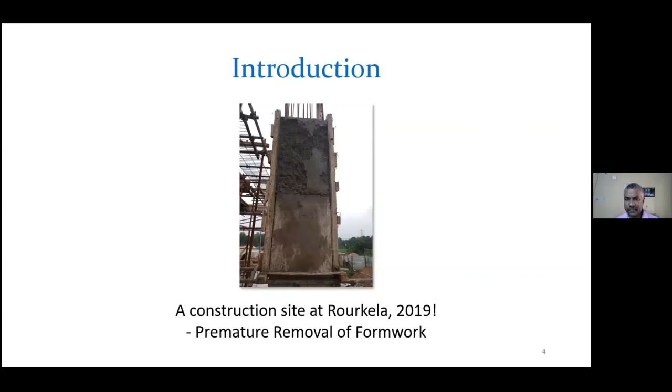Now, the problem is paucity of available instruments for civil engineering structures, and lack of technologies available for the automation of civil engineering construction. So we don't have instruments to place and get information from civil engineering structures, and there are no technologies for automating this to avoid this type of problems.

But you can be sure that automation in the construction industry is indispensable to significantly improve productivity, quality, economy, safety, flexibility, accuracy, and whatever you think. Automation is coming in every other domain of engineering, but it is not aggressively coming to civil engineering construction. So there is scope of work for all of us, all the civil engineers, in this particular area.

So this, as I said, is a big problem. A lot of things to be done. In our group, we have started a small first step forward in this direction, and for the last 2 years some students have been working on it. I want to share what we have done, and I feel it will motivate all of you to bring some of your interest into this particular area. The problem we have first started is monitoring of early age properties of concrete at real time.

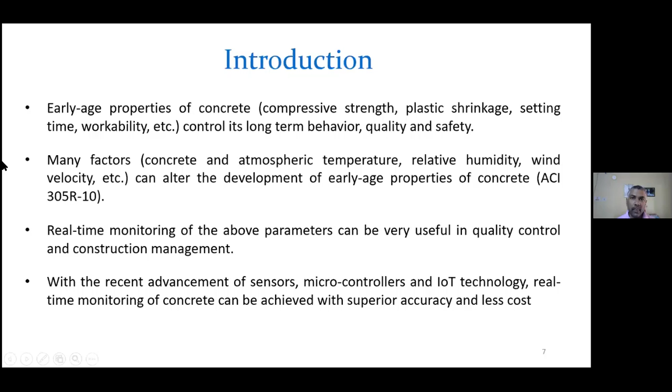Now let us concentrate on compressive strength of concrete. So how do you measure compressive strength when concrete construction is going on? We do check concrete compressive strength, and we check the quality of concrete through this parameter, the compressive strength of concrete.

What we do is take specimens, either cure them at the field itself or cure them at the laboratory, and then test them after a certain time, on the 7th day or 28 days or 14 days. Now, whatever curing condition you are doing for the specimen, you may not be doing the same curing condition for the structure. So there is a variation of curing condition, and your field-cured or lab-cured specimens do not represent the actual curing condition of the structure.

Definitely there are other conditions, like your local environment of the specimen and local environment of the actual structure may be different. So it does not represent the in situ concrete. The specimens really do not represent the in situ concrete. So whatever strength you get for the specimen, they are not representative, most often, to the actual structure.

There are other problems. Let us assume they are giving you actual info representing the structure, but you are getting a delayed result. You know the problem at the 28th day, or 7th day, or 14th day, when you are not in a position to make a change in your structure. So this is not useful in that sense. When you know the problem, by that time maybe the structure has progressed a certain amount, and you cannot dismantle that part and correct the problem. So you have to do something else.

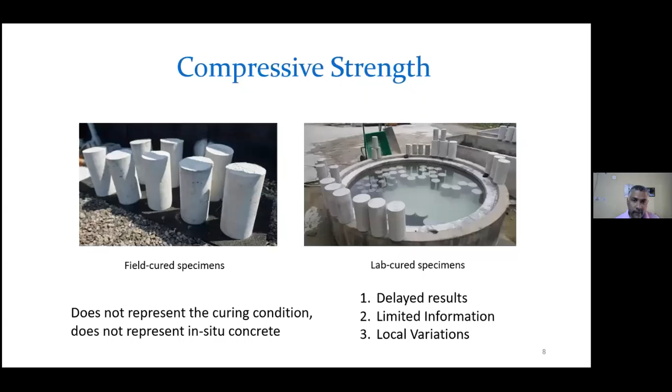So that is one more problem. To support this, there is an instrument called the concrete maturity meter. What is that concrete maturity meter?

Concrete maturity is a very old parameter. Maturity is a function, a temperature time factor, TTF. In different codes and standards, this temperature time function is directly correlated with the compressive strength at 1 day, 3 day, 7 day, and 14 day. From this function, we can find out the compressive strength at different times.

So maturity is a relationship - maturity is a temperature time function, and there is a relationship between this maturity and the concrete strength of a given mixture. This relationship is used by the concrete maturity meter, and it can tell you the progress of strength, or how the strength is evolving at early ages.

So what is this maturity method? Maturity method is a concept that has existed since 1950. It is a non-destructive method to estimate the strength development of in-place concrete, specifically at the early age. Early ages means less than 14 days age.

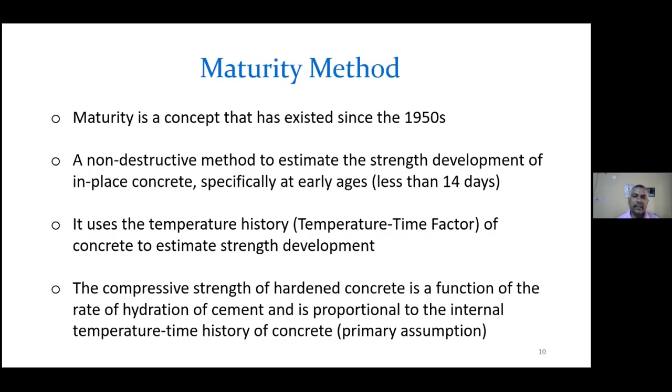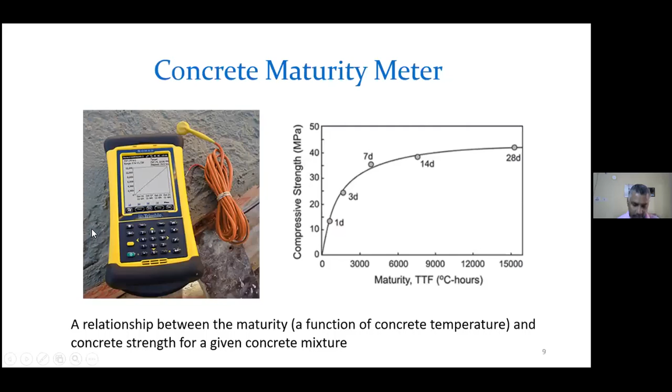Now let's see how to find out this datum temperature. This datum temperature comes only for the American standard, and the code gives a procedure to calculate it. Otherwise, you can conservatively take some values. The code gives some values, but it is not very difficult to develop this value of datum temperature.

As per this code, for a given mix of concrete, we develop a strength-age relation using a mortar specimen. For this mortar specimen, whatever the cement-to-aggregate ratio, similar cement-to-sand ratio, we prepare the mortar. For the given mix, represented by cement to aggregate and water to cement ratio, keeping everything intact, we develop the mortar specimen of a particular mix.

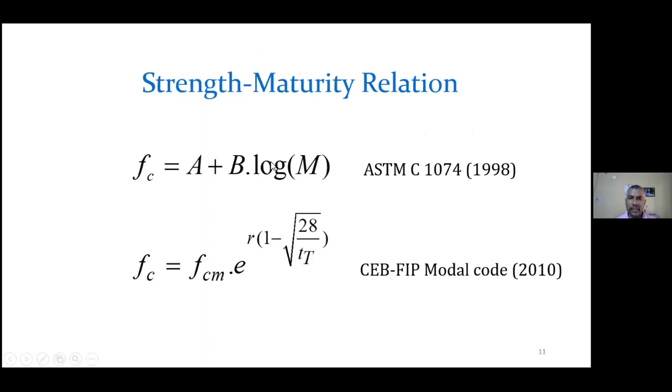If we know the datum temperature, I will record the temperature with time - temperature time history - and deduct the datum temperature. At that age I take this area, I get the maturity, and from this maturity I use this formula to get the FC. That is what our maturity meter is doing. Therefore I can find out the strength.

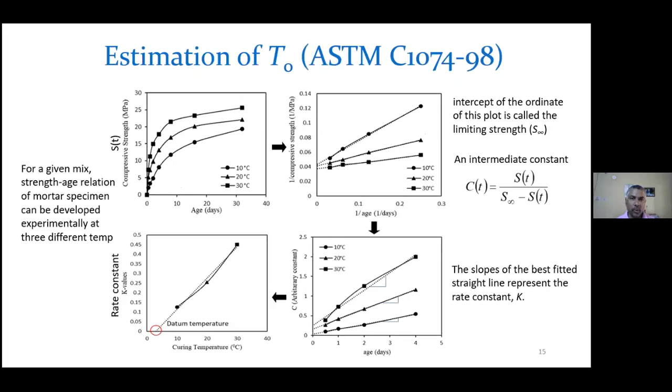But what is the problem with this maturity meter? There are certain drawbacks - I will not say drawbacks, certain problems with this maturity meter.

The manual recording of compressive strength - what they do is put a sensor inside the concrete while casting, with some Bluetooth mechanism. They send temperature data to an instrument with an SD card, and you have to go with this instrument to the site, take the temperature data at a particular time, come back to your computer, process this data using equations stored in your computer. So you need software to process this data, which tells you what the strength is.

So it is not a continuous process. You will get intermittently the compressive strength data. There will also be a lag of time. When you go and collect the temperature data and process it, you get data that is not exactly real time - there is somewhat a mismatch of time.

Manual recording of compressive strength of concrete at the site by measuring the internal temperature - as this instrument is operated manually, frequent recording of internal temperature is cumbersome for real-time prediction of compressive strength. A software program is generally required by the conventional maturity meter to extract and analyze the data in a computer. That means again you have to trust another person.

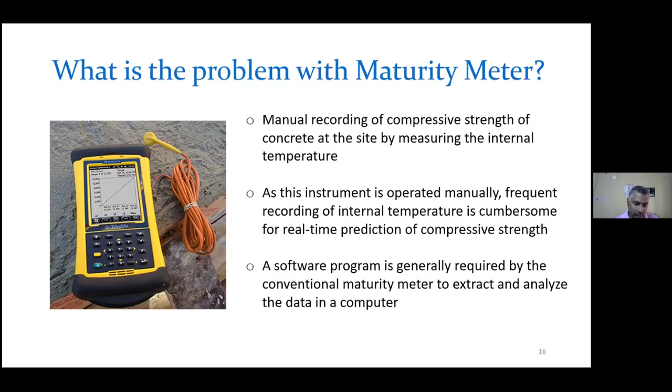The construction manager will send someone to get the data, and he has to depend on his performance. By the time he processes the data and gets the values, it is not real time data. So our objective of today's presentation is to show you how we have automated this procedure.

How to overcome this shortcoming? To automate this procedure, an IoT enabled setup is proposed for real-time monitoring of early age compressive strength of concrete using the principle of maturity method. We are not proposing a different method, the same method, but I want to show you a procedure which will truly make this system automatic.

And these same two codes we are also following. And now I said IoT enabled setup - for us civil engineers, we don't know what IoT is. What is IoT? I also did not know 2 years back. Recently, I came to know about that.

IoT is Internet of Things, a network of interconnected devices that can communicate data gathered from a monitored field through a wireless link. This is the definition I got. There is no human interaction required - it is only machine to machine communication.

So you see there are some devices, sensors and actuators, whatever devices are there, they send the data to a gateway. From the gateway, the data goes to a cloud platform, and from the cloud platform you can get the data in any application that you want. So this network of interconnected devices communicates data gathered from a monitored field through a wireless link without requiring any human interaction - directly from device to application you get the data.

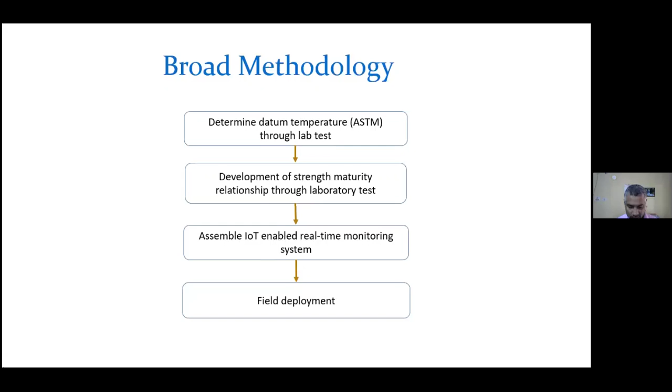Once we know the strength maturity relationship, we assemble this IoT enabled system and deploy it at the field. This IoT enabled system is a framework of interconnected devices where the strength versus maturity equation is already built in. Sensors in the field measure the concrete temperature, which helps calculate the corresponding maturity and therefore the corresponding strength, and this strength data becomes available on remote devices like a mobile phone.

In our problem we need only concrete temperature. So in a structure we put a sensor connected wirelessly through a Wi-Fi microcontroller, needed for sending data to the cloud platform. The data collected is temperature versus age, so as time progresses, how the concrete temperature varies is recorded as the temperature time history.

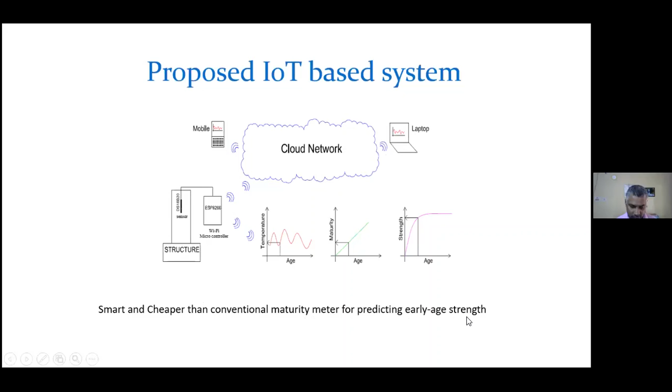Once we have the temperature time history, we can find the maturity, which keeps increasing as age progresses. From this maturity data we find the strength data, since we already have the maturity-strength relation. This strength versus age data goes to the cloud platform, and from there to mobile or laptop, accessible everywhere. It's a smart and cheaper system than a conventional maturity meter for predicting early age compressive strength. This is as simple as that.

Now I'll tell you a little detail about that. We have chosen a temperature sensor, and you can see its size is actually very small, with a wired connection to connect it to the microcontroller. This sensor is digital, waterproof, with a one wire interface, and it can resist the alkaline type environment of concrete.

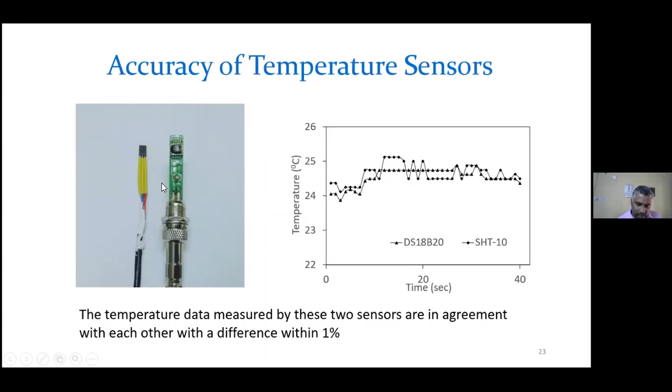Now we need a microcontroller. The sensor will record the temperature data and send it to the microcontroller, but the microcontroller will process the data. That means the microcontroller has all this program, and it will calculate the maturity and the strength. The program here will be calculated.

So it is small in size. You can see the size in comparison with a 10 rupee coin. It is low cost, and it is a 2.4 gigahertz Wi-Fi microcontroller that can make a simple TCP/IP connection supporting an 802.11 network.

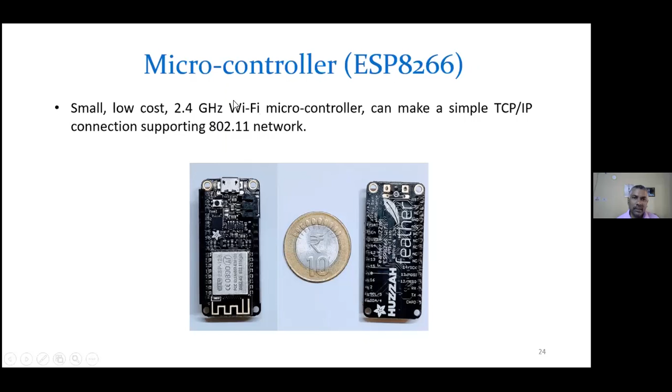So these are some electronics information. The total setup is like this: we have a board where this microcontroller is attached, and this sensor is also attached with the board. This sensor will actually be inserted in the concrete, and the concrete temperature will be measured and the data sent to the microcontroller.

DS18B20 sensor is connected to the ESP8266 Wi-Fi microcontroller, which will connect to the internet and post the data in the cloud. So you need to have a Wi-Fi router also. The availability of internet is required so that this microcontroller can send the data to the cloud.

We need a storage platform on the internet, and presently we are using thingspeak.com, a cloud platform, to receive the data from wireless sensor nodes through the internet and to supply the information whenever required for further processing and display. The red line shows a typical ThingSpeak plot where we can also get this temperature versus time data. You can see here on thingspeak.com we are getting the time history of the concrete temperature.

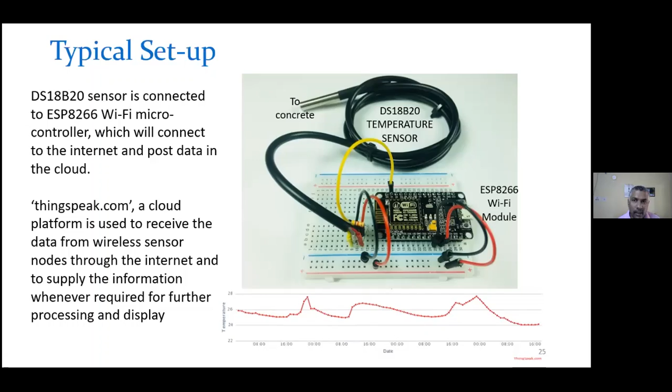Now I want to summarize the total procedure. The prediction of early age strength requires the strength-maturity relationship of the given concrete mix. This relationship must be calibrated with actual strength data for accuracy. The DS18B20 sensor records the internal temperature of the concrete in real time and sends the data to the ESP8266 Wi-Fi microcontroller. The microcontroller calculates the early age compressive strength based on the developed strength versus maturity relationship for the corresponding concrete mix. Is that clear to all of you?

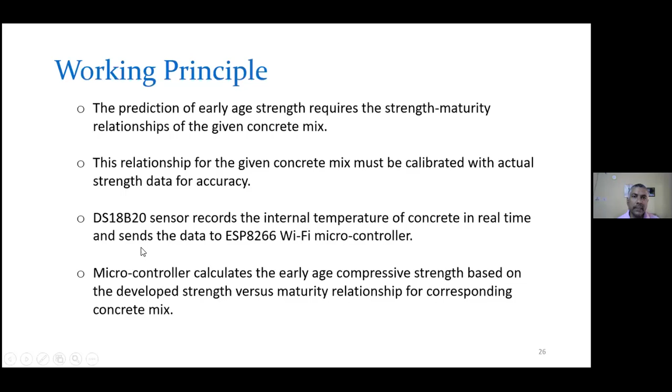Now, how does it calculate? It requires a program, right? So the Arduino integrated development environment is used to program this microcontroller using the C programming language. This is the program that calculates the strength or maturity from the temperature time history.

A new channel was created in thingspeak.com containing the following fields: the microcontroller sends data of temperature at real time, maturity index at real time, and corresponding early age compressive strength also at real time. The address of the ThingSpeak channel and the Wi-Fi login credentials should be provided in the C program, because the C program is going to send the data. So the address of the cloud platform channel and the Wi-Fi login credentials should be provided in the C program fed into this microcontroller.

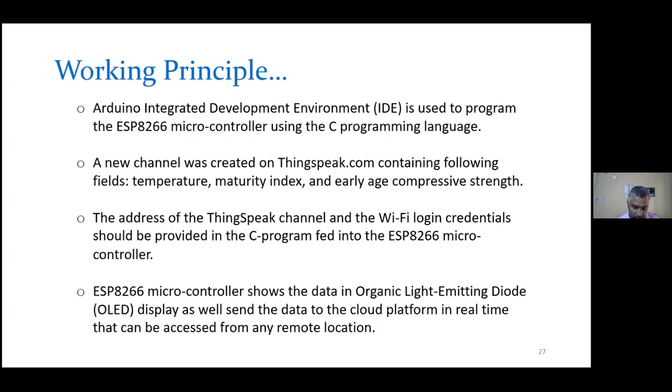So the entire setup needs to be protected from voltage fluctuation and power loss. You have to have a UPS. So this requires power, and one uninterrupted power supply is utilized for this purpose.

So the first part is to calibrate the compressive strength versus maturity index, the strength-maturity relation. You have to take some specimens and measure compressive strength versus age. From there, maturity index versus age will be calculated, and as per code—the ASTM code or European standard CEB-FIP model code—we can find the compressive strength versus maturity index relationship. Once that is done, this system is deployed at the site for prediction. At the site, it will measure the temperature, from there develop the maturity, and then develop the compressive strength at real time.

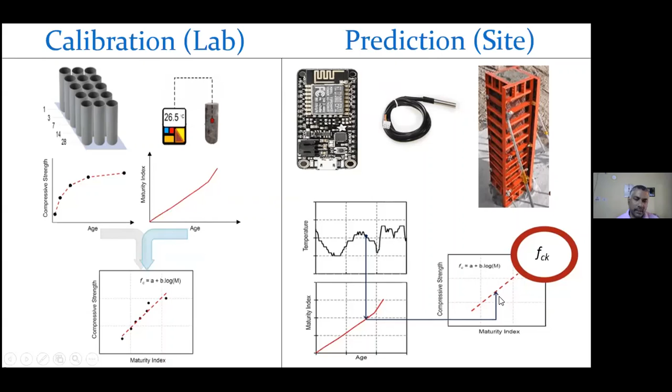Now for this whole thing we have used certain materials. This shows the material property of the cement and the aggregates we used. You can see here standard tests like setting time, specific gravity of cement, and we have used Portland slag cement, fine aggregate specific gravity, and specific gravity of coarse aggregate.

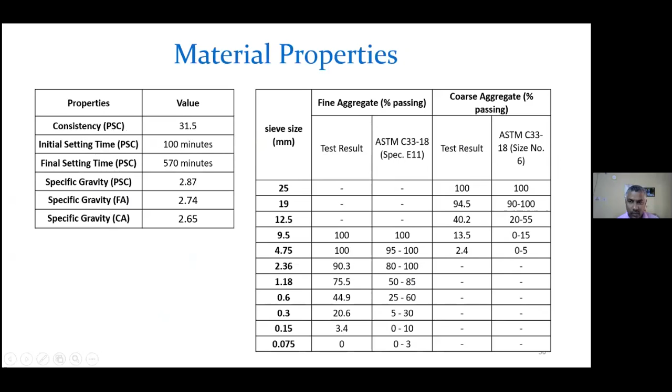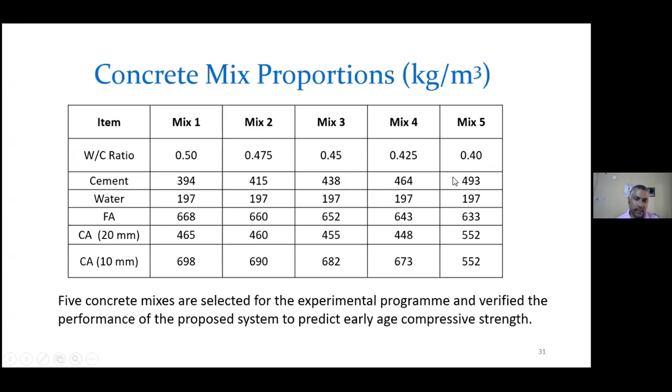This is the gradation of the coarse aggregate and fine aggregate, and they are all within the limit of the code. Now for the mix proportions, 5 concrete mixes are selected for this experimental program, by changing the water cement ratio to get different strength values. These 5 mixes were selected from published literature and used for this case study.

Corresponding to the 5 concrete mixes, 5 mortar mixes are prepared, representative of each concrete mix, keeping the cement to aggregate ratio and water to cement ratio constant. These representative mortar mixes are prepared and cured at 3 constant temperatures: 10 degrees, 20 degrees, and 30 degrees.

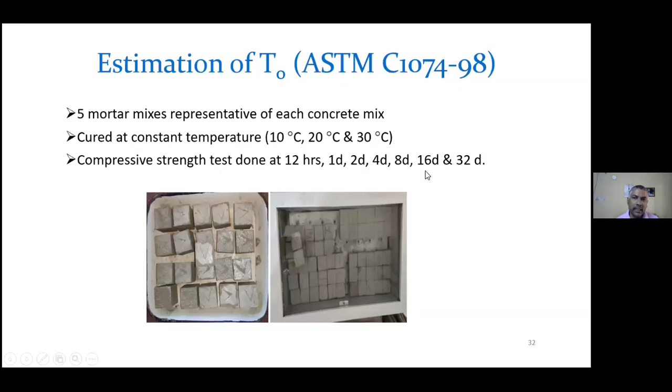For the compressive strength break test, the specimens are broken in a compression testing machine at 12 hours, 1 day, 2 days, 4 days, 8 days, 16 days, and 32 days. So that is the first thing done.

At 10 degree temperature you have 5 mixes. When cured at 10 degree temperature, this shows how the compressive strength versus age data progressed. This is at 20 degrees centigrade and at 30 degrees centigrade.

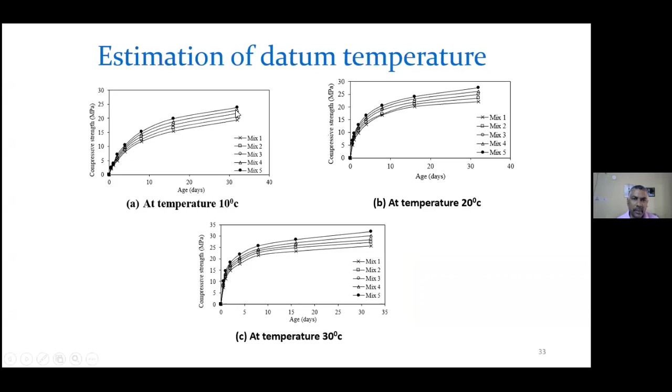Once we have this data, we find the procedure for datum temperature calculation. Remember these are actually averages of 3 specimens. So we found the datum temperature for each of the 5 mixes, T naught, in degrees centigrade. That was one precondition for our maturity method procedure.

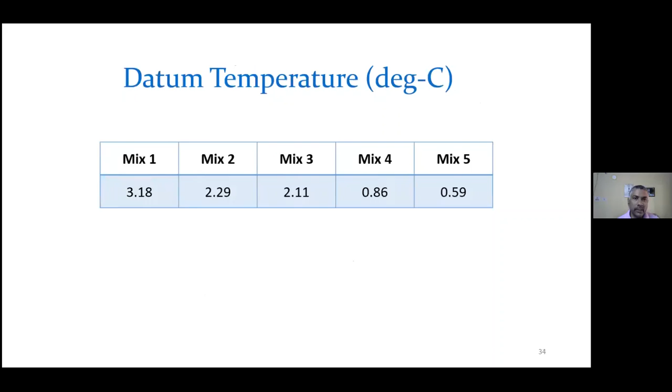Now the next thing is development of the strength-maturity relation. 18 cylindrical concrete specimens of each mix are prepared. Once we know the datum temperature, we prepare cylindrical specimens, 18 per mix, a total of 90 specimens for 5 mixes, cast as per the code.

Temperature sensors are inserted into the fresh concrete of 3 cylinders for each mix during casting to record the internal temperature of concrete every 60 seconds. All 18 cylinders are placed for curing in a water bath.

3 concrete specimens from each mix are tested in the compression testing machine, the break test, at different times to know the actual compressive strength. The other specimens give maturity values, and we assess the temperature through the maturity method.

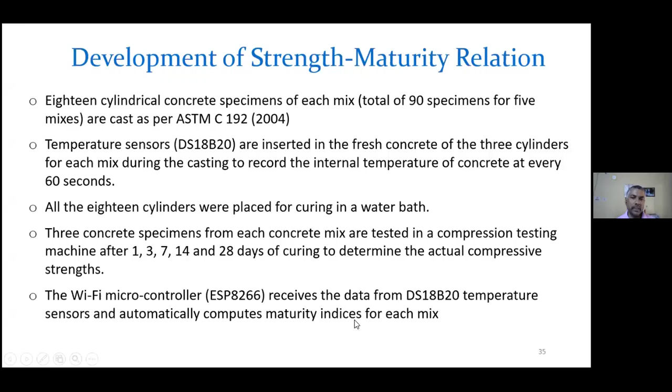The Wi-Fi microcontroller receives the data from these specimens and automatically computes the maturity indices of each mix. So you see here, this many specimens are there; 3 of them are instrumented and others are kept for the break test. These 3 are not broken; they are kept to send temperature data continuously up to 28 days.

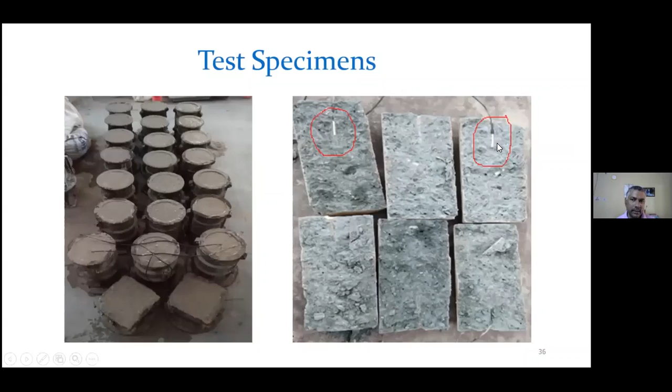From this temperature data, the maturity index is calculated, and these other specimens are meant for the break test. You can see in the red circle a white colored thing, which shows the location of the sensor inside the specimens.

So it is something like that: in a curing tank, we put 3 specimens for each mix, and they give the value of temperature. We take an average of these three temperature readings, and from this temperature value we can find the maturity, the temperature-time function maturity.

How we get this data uses the same methods. There is a Wi-Fi network, and with the help of this network from the microcontroller connected to the temperature sensors, the microcontroller sends data to thingspeak.com, and from thingspeak.com we can access it on our laptop or any mobile phone.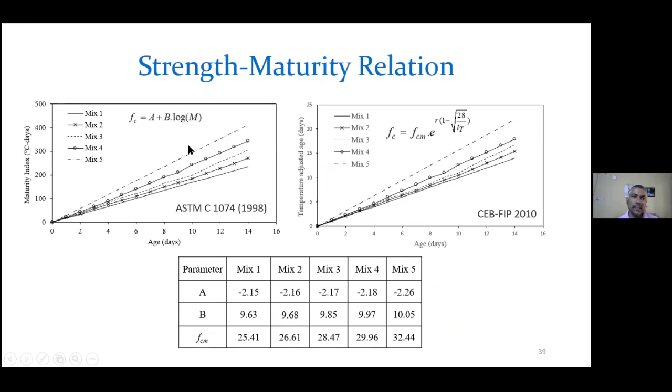So far in this experiment we were calculating only maturity, because we did not know the relation between maturity and strength. But now, after this exercise, we know the relation between strength and maturity, so next time we don't have to calculate only maturity, we can calculate strength directly.

To validate this, a set of 15 concrete specimens was further cast for each of the 5 selected concrete mixes, so 5 into 15, 75 specimens in total. The proposed IoT-based system was implemented for 3 out of the 15 specimens, and the remaining 12 specimens were tested for compressive strength at ages 1, 3, 7, and 14 days of curing.

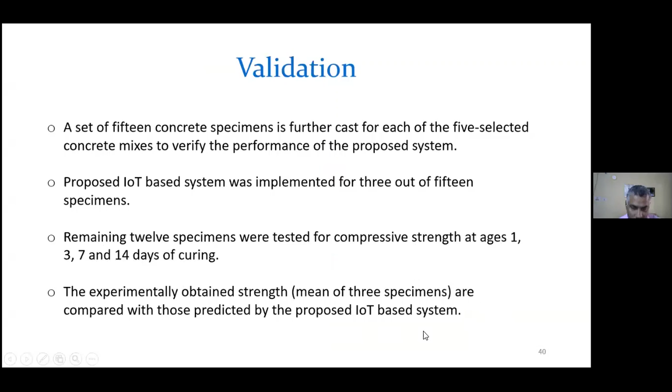The experimentally obtained strength, the mean of 3 specimens, is compared with those predicted. Now I will show you the values we got, that is age versus compressive strength.

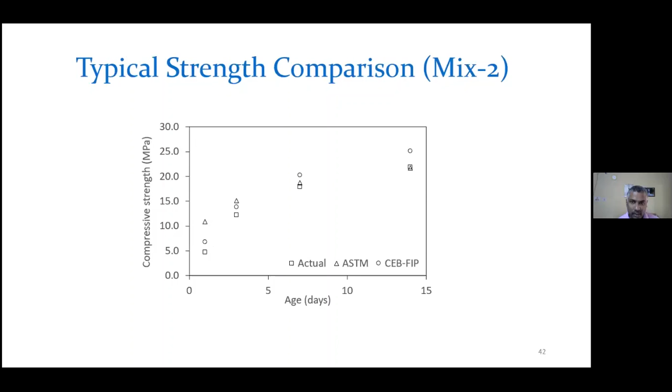This is mix 2, so mixes 1 and 2 are presented here. For all 5 mixes we got almost similar types of results. For one mix I have shown you the detail of the type of error we got, and for the other mixes we got similar results.

Here we can see the error is a little high for ASTM at the early ages, very early ages, but as it gets closer to 14 days the error reduces. CEB-FIP gives different results, here the errors are comparatively low initially, but later the errors are higher than ASTM.

So the error presented here is not the error of our system alone. There is some error associated with the maturity method outlined in the code itself, the code equation also has some inherent problems, and some error may also be there in our implementation. So the error presented here is a combination of the inherent error of the maturity method and the accuracy associated with the proposed system.

But still, if you compare the actual value and the predicted value, you will see it comes very close to the actual value. The predicted compressive strength is very close to the actual values.

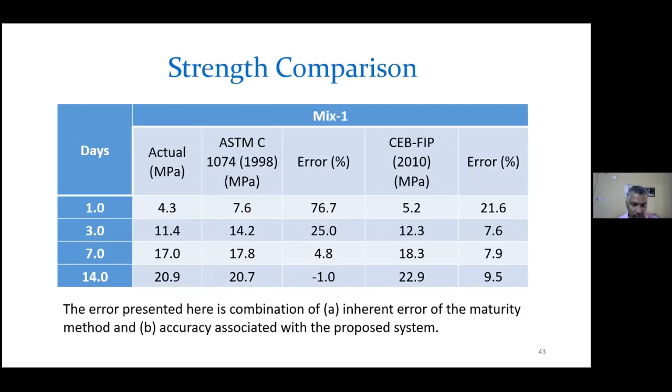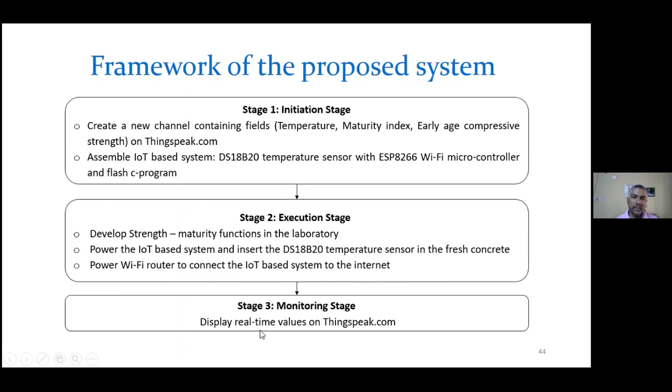In the monitoring stage, display the real-time values on thingspeak.com. So it is like that, we have developed the same maturity meter, a little different but very effective one.

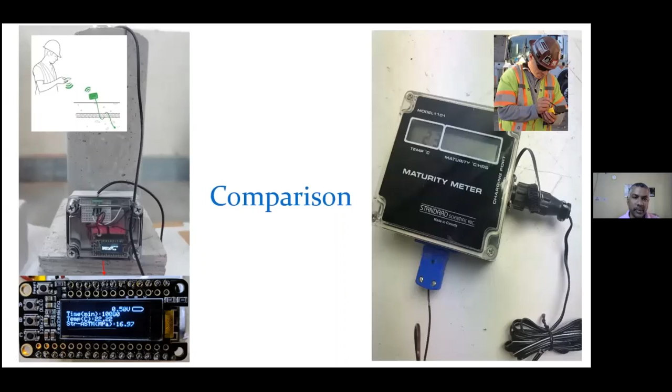You must be thinking that it is very expensive. So we have made a cost comparison. The IoT based system developed for early age compressive strength is cheaper than the conventional maturity meter. To purchase a maturity meter costs about 1,000 to 1,500 US dollars.

But the whole test setup for us took only about less than $50. You can have cloud connectivity and Wi-Fi connectivity to the proposed IoT based system. But the maturity meter does not have such options, and it requires human intervention, whereas this system does not require any human intervention.

And you get monitoring at real time. You can also get monitoring at real time in a conventional maturity meter as they claim, but actually there will be some delay. So you don't need software or a data logger for this system. It can give you the data directly, but for the maturity meter you need software to process the data, and you need a data logger to receive the data.

Now I will conclude by telling you about our initial problem of vertical formwork stripping. We have applied this procedure for vertical formwork stripping. When you have to remove the formwork - I told you about the Skyline Plaza accident, where people removed the formwork prematurely - so we checked the codes.

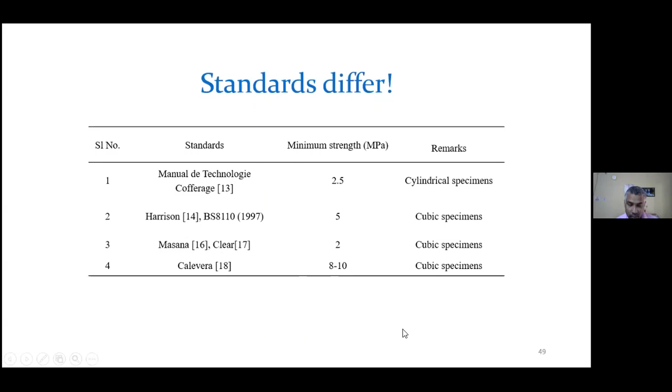Now we tried with our instrument, and here one interesting thing we did - you can see that everything is happening between 9 to 24 hours. So the strength-maturity relation normally considers about 0 to 14 days, right? This early age property is up to 14 days, but 14 days is too long.

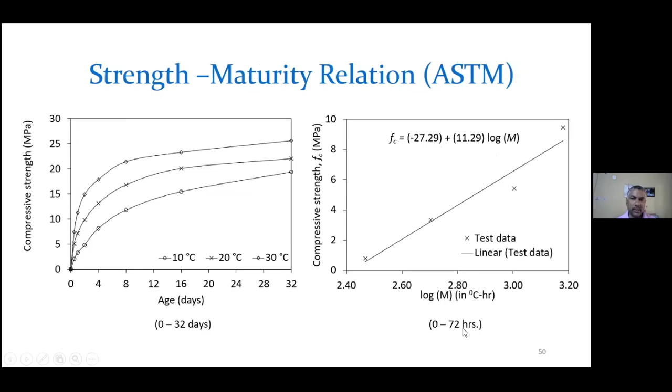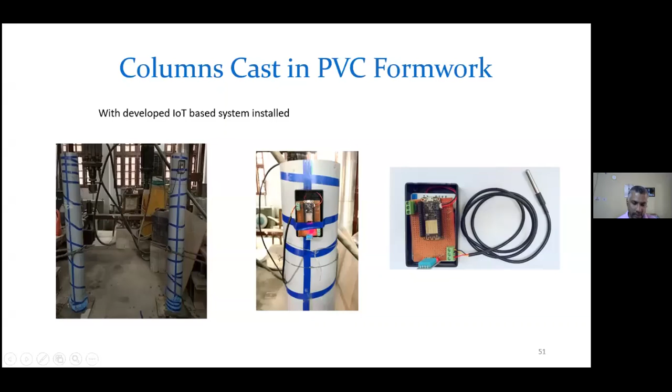Here it is the temperature sensor, DS18B20 sensor, and we find the output of the system. So we can find out the concrete temperature - how concrete temperature varies on thingspeak.com, and how concrete strength increases, with some of the data at a particular stage.

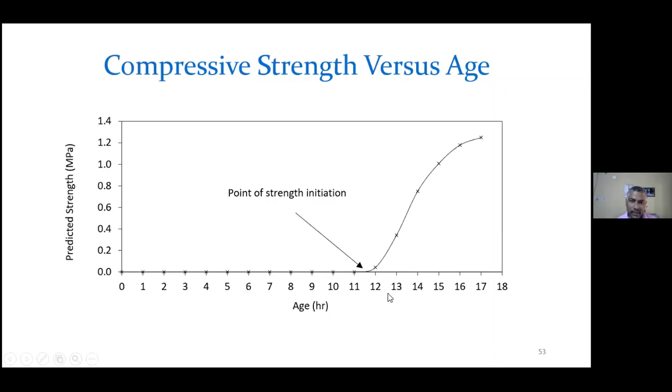For this mix that we have used, Portland slag cement, we cannot remove formwork at 9 hours because there is no strength at 9 hours. So 9 to 12 hours is not actually appropriate, though many people and many codes have suggested 9 to 12 hours. That is not the case, at least for this mix.

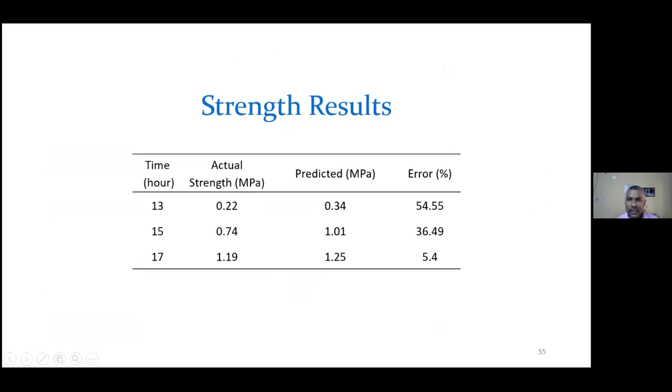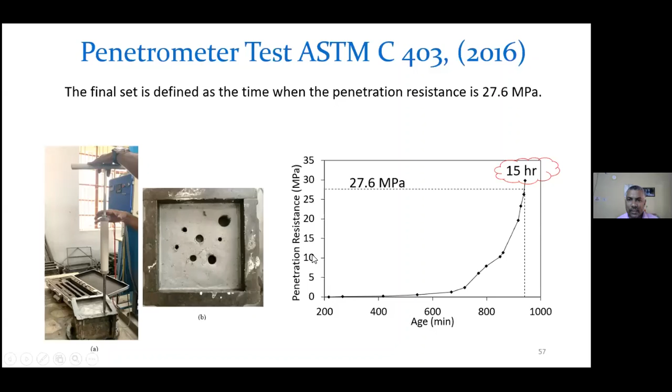This plot is penetration resistance versus age. You can see that 27.6 megapascal is reached at almost 15 hours. So this 15 hours is, because it is also approximate, this is one of the examples where we have tried to use this method.

Hello, is there a problem, Babu sir? No sir, now it's okay sir. Now we can see you actually, not the slide. Okay, so I will again share the screen, right? Yeah.

Is that fine? Yeah, you continue.

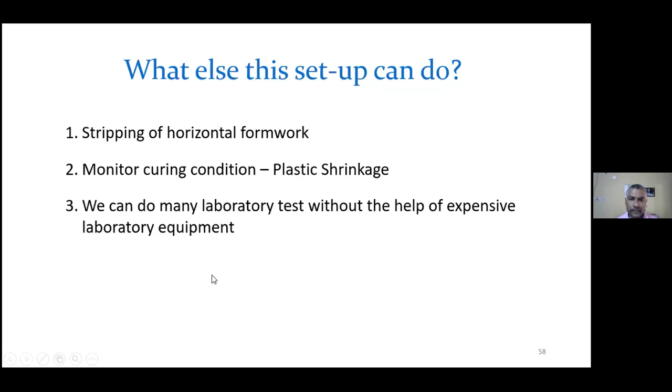And if you are interested, I want to show a couple of slides on this, the plastic shrinkage crack.

When you cast concrete, bleed water comes out to the surface of the concrete, and if you have a higher evaporation rate due to wind, humidity, and the atmospheric temperature, then you find cracks and you require curing water at that point of time.

But many times in real construction sites, people are not giving attention to curing. So we thought to check this evaporation rate and bleeding rate through this sensor and get the information to the project manager, so that he can intervene and take necessary measures for better quality.

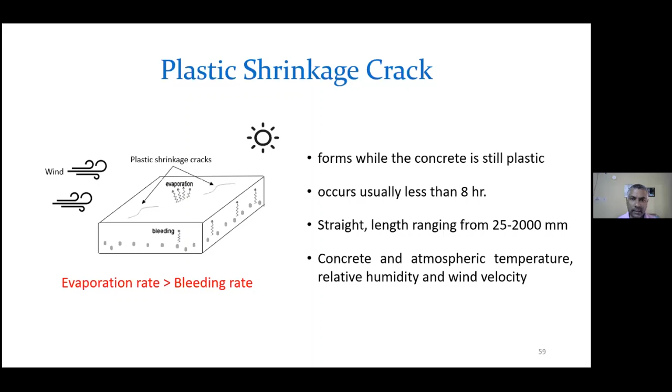Some formulations are already available to find out the evaporation rate, and it depends on temperature of concrete, relative humidity, temperature of the atmosphere, and the wind velocity. This is as per the ACI code.

This is ACI 305R, and there are some other equations with these three parameters. So if we can measure the concrete temperature, atmospheric temperature, relative humidity, and wind velocity, we can easily measure the rate of evaporation.

The code says if rate of evaporation is less than 0.5, there is no probability of plastic shrinkage to occur. If the evaporation rate is 0.5 to 1, there is a medium probability. If it is greater than 1 kg per meter square per hour, this being the unit for evaporation rate, then there is a high probability.

So we can measure this evaporation rate through these indirect measurable parameters, and then check whether it is growing, if it is more than 1 kg per meter square per hour or more than 0.5 kg per meter square per hour, and we can take corrective action, right?

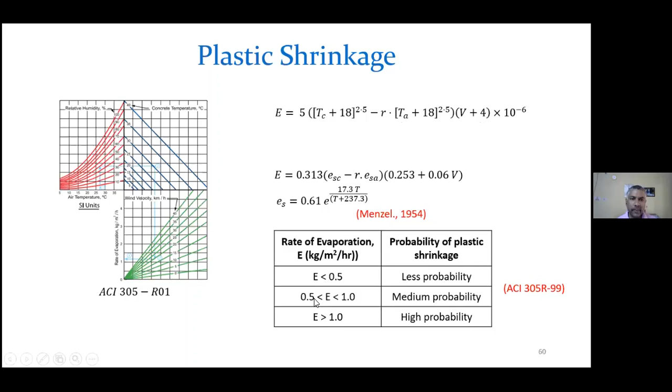For that, I just wanted to skip some slides. Here is the sensor to measure wind velocity. This is the same sensor, DS18B20, to measure the concrete temperature, and there's another sensor which measures both relative humidity and atmospheric temperature.

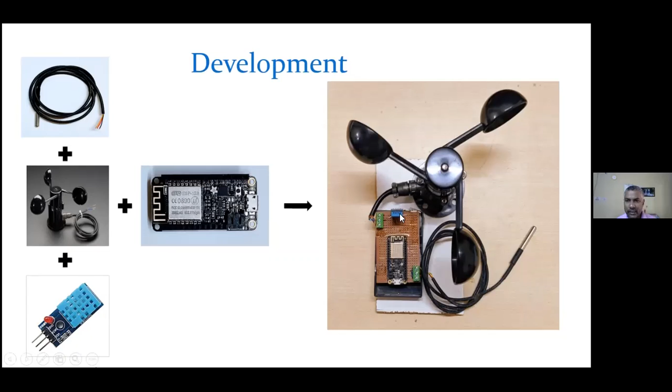So we have put it together, and this is the microcontroller, same our ESP microcontroller. We have put it here and made a system for that.

But in the laboratory, varying temperature, atmospheric temperature, wind velocity, and relative humidity is a difficult job. So my students tried a temporary setup where we can vary temperature, wind velocity, and relative humidity, everything, and check.

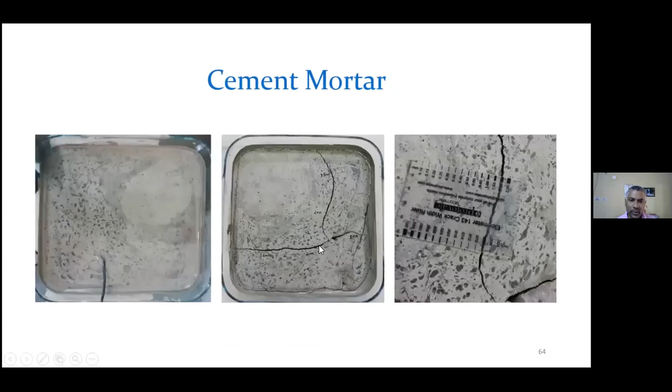And we found that the plastic shrinkage crack forms by forcing different parameters. These are some of the data that we have got on our cloud platform.

We found that if we can get this type of information, that the rate of evaporation is exceeding a particular value, 0.5 or 0.4 here, somebody has to cure the structure to stop this plastic shrinkage crack. If this crack happens, then the long-term behavior of the structure will be compromised.

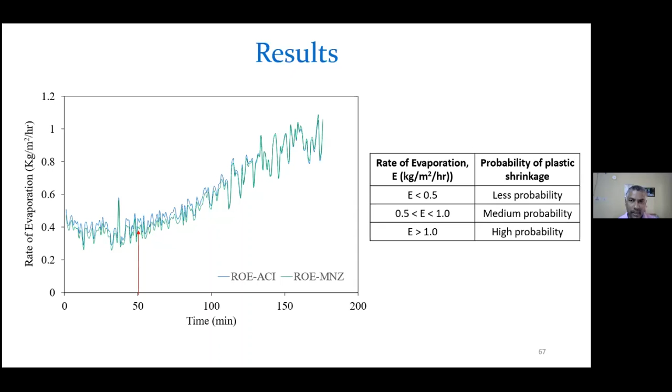So with that, I want to make a concluding remark that an IoT-based system is developed for real-time monitoring of early-age properties of concrete, which is very cost-effective and will help the control of quality, and also it can bring economy in our project, and it will help the project management effectively.

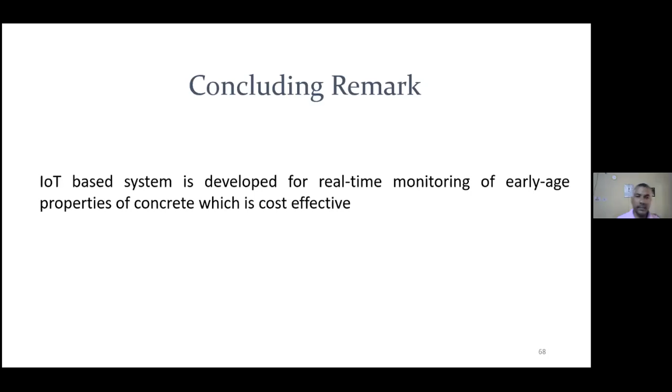Also, whatever I have presented here, I want to acknowledge that the entire work, all the credit goes to my students. I have understood the problem from them, and they have executed the work, and I'm just presenting on their behalf.

Thank you very much. Now I can take up a couple of questions if you have.

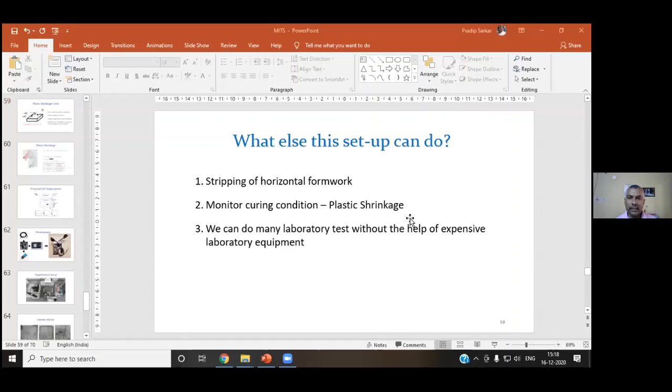See, datum temperature is just a moment. Datum temperature is required to calculate, see, if you are using this ASTM method. Okay, one second.

So in ASTM method and Europe CEB-FIP, both places you need this M and tT. The M, in the calculation of M, requires a value T naught. Unless you have a datum temperature, you cannot find out M. And if you cannot find out M, you cannot find out the FC.

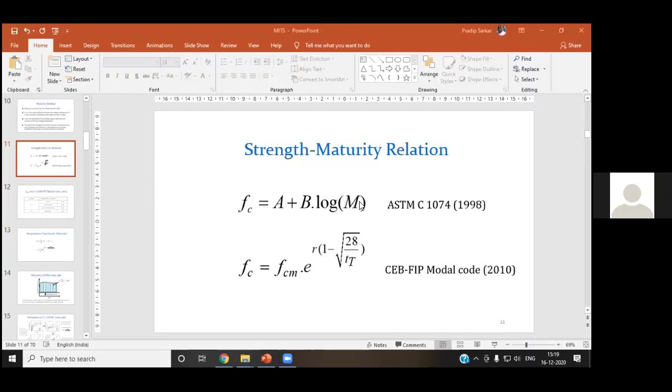So my doubt was, does the datum temperature mean the temperature in the initial stage when we cast the cylinder? No, it is something different.

I'll tell you, here it is. Datum temperature is defined in this line of the code I have kept here. Datum temperature is defined as the temperature above which the hydration process and strength development of concrete are most likely to begin. So this is the concrete temperature, meaning the temperature at which hydration is enough to initiate the strength gain. That temperature is the datum temperature, so maturity will be calculated beyond that temperature.

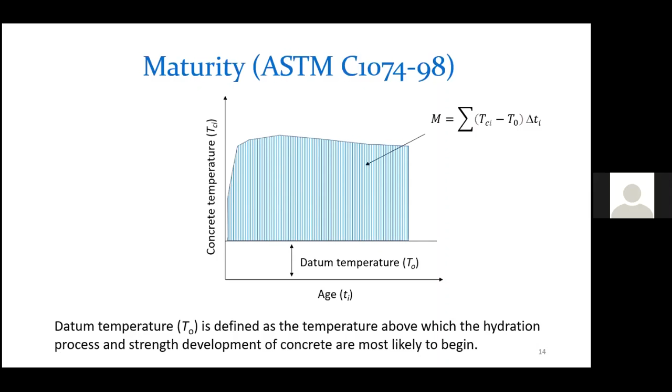Pradeep, I have a doubt. Yes sir, please. Whether this method is applicable for all types of structures, sir? It is applicable for all types of concrete structures, like slabs, beams, yes, this is for concrete.

It will give you the compressive strength development at early ages. Now why you need that compressive strength can change. Like for a vertical column, we have done this test to check when we can remove the formwork, and we concluded that 1 megapascal strength is enough to remove the formwork. But for a slab or beam, this 1 megapascal requirement may be higher, because it has to take its own weight.

Now for a vertical formwork, the weight is transferred directly, there is a direct load path. But for beams and slabs, the load path is different. Otherwise, the method is the same.

Then while taking the temperature for the calculation of maturity, if we take the outside temperature of the concrete instead, what is going to happen? No, no, this temperature is due to the hydration heat. Outside, you won't be able to get that temperature due to hydration, so you have to get the inside concrete temperature.

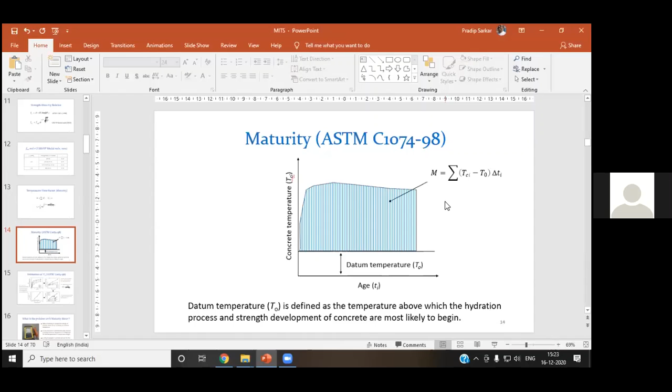Then in the cost comparison, you're saying that the IoT based one is cheaper compared to the maturity meter. Yeah, it is very cheap, they are around 100 rupees, 200 rupees. Then in terms of results, which is better?

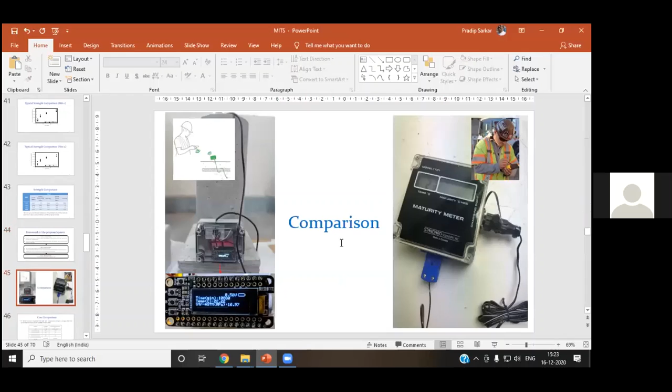Now sir, both the instruments, the maturity meter and the IoT based setup, are using the same formulation. Exactly the same formulation. This also computes the temperature from a sensor, and the IoT based setup also uses a temperature sensor. Here everything is user defined, you can buy a slightly more expensive sensor to get better values. Otherwise, we have tested in the laboratory that it gives values very close to each other, the errors are not that big.

Although we have not tested the error associated with this maturity meter, if you check, you can buy a maturity meter for a certain cost. But the same thing you can build for $50 US dollars, which in Indian rupees, multiplied by about 80, comes to about 4,000 rupees.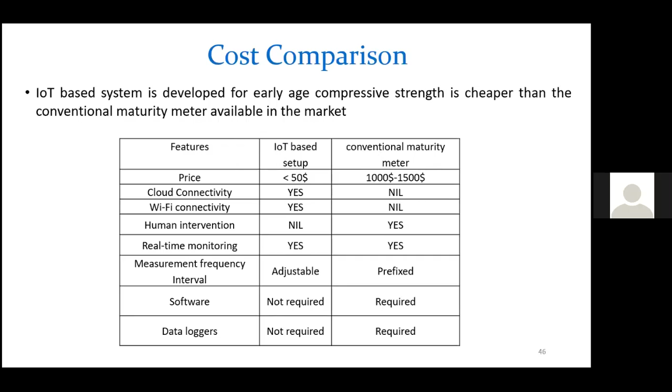Please, any other questions? Pradip sir, relating to that, I have heard that you have used ESP, right, for the microcontroller. Yes, yes. I have also heard that Arduino as well as ESP are not useful for long-term study. They will just tell you, there are certain disadvantages I forgot to mention.

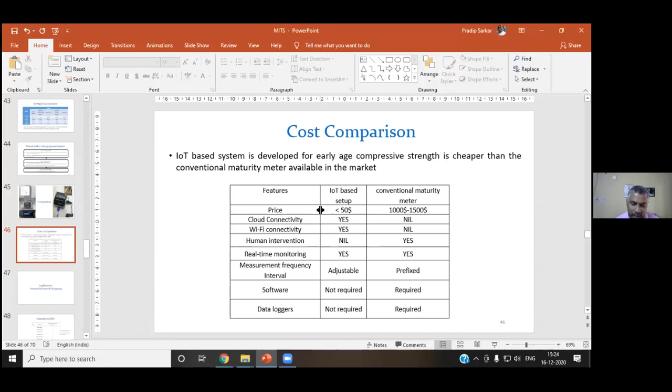This disadvantage shows up when you actually install it at the site. Let me show you one of our laboratory setups. So you have a wireless Wi-Fi router, but it does not have too much length, right? It cannot work for a very long distance. And you need a UPS for it.

For all these things at a project site, getting Wi-Fi in a real project is difficult because the site will be very long. So it is difficult, and what you said is also somewhat true. In a small duration laboratory scale experiment it works well, but for real field implementation we are now trying a technology called LoRa, which has long range connectivity. I heard it can cover a 2 kilometer by 2 kilometer side. In one gateway, if placed at one location, it can catch data from sensors up to 2 kilometers away.

So now we are planning to extend this work. We are actually on the job for real field implementation. As of now, it is a laboratory scale small test setup, not yet ready for field deployment. But I can tell people at educational institutes that I have benefited from this system for many tests, because in the laboratory we have a problem of funds. We cannot buy many equipment, but using this technology, most of our laboratory test requirements are satisfied by indirect measurement of so many parameters.